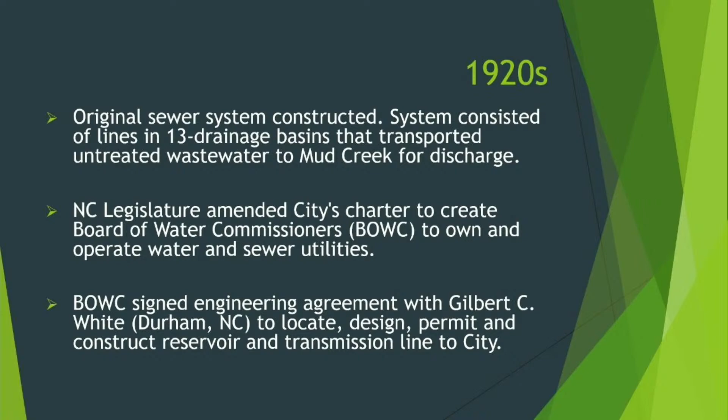Then in the 20s, the legislature changed the city's charter and created the Board of Water Commissioners, a 3-man board charged with the operation and maintenance of the water and what was going to be the sewer system. In that same time frame, they signed a contract with Gilbert White out of Durham, North Carolina, to do the permitting and locate the reservoir for the water system, which they located on the North Fork of the Mills River, along with a transmission line and a reservoir in town, near Laurel Park.

The impoundment and the lines were about 17 miles of cast iron line that was built to Ewart Hill, which is a 5 million gallon in-ground storage tank, still there, at a cost of about $461,000 for 17 miles of cast iron line. That just amazes me, and to see where this line is, it's incredible.

Lee, can I ask just a question of ignorance? I've been up there - is the line that comes out, that cast iron line, still the same one that was put in the ground in 1920? It sure is. Yeah, we keep enough velocity through that line to try to keep sediment out, and it's still in good shape.

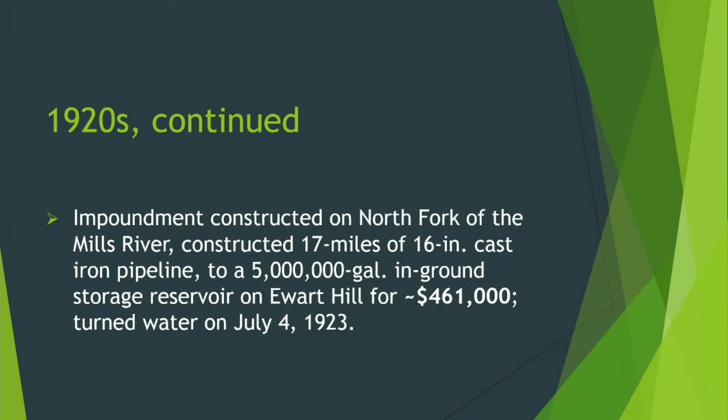Just for the benefit of the citizens listening to this, it's worth a trip. It is, it's really quite amazing, to see where these people built this. But don't bring your fishing pole, leave that for me.

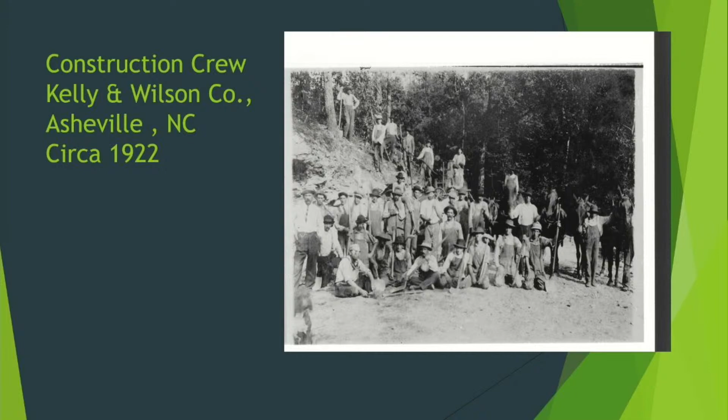Kelly and Wilson was the contractor out of Asheville. I'm guessing there's no reference to this being that crew, but this is the only photo that we have.

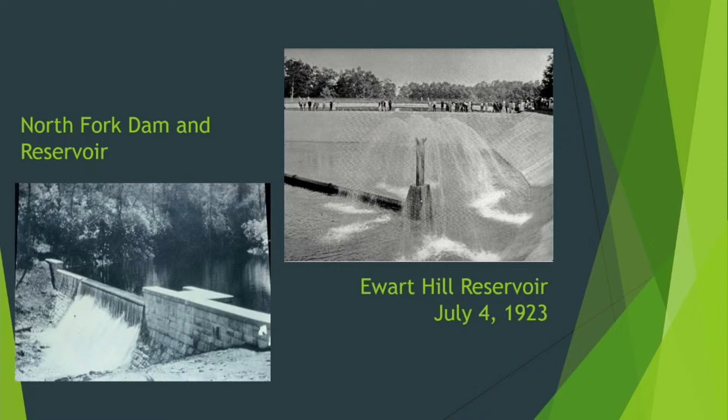Apparently they decided that wasn't enough water. So in the late 20s, they went to Bradley Creek, a tributary to the South Mills River, and built a little over 7 miles of 20-inch pipe at a cost of about $250,000.

If you know where the Woodpecker sawmill is, some people do. I've seen it, but I don't know that I can take you right to it, but I could find it. That's where the two lines converge, at a cost of $250,000. If you've ever picked up any part of a cast iron line, it's amazing to think these are 18 or 20 foot joints of pipe. I can't even begin to imagine how they moved them around.

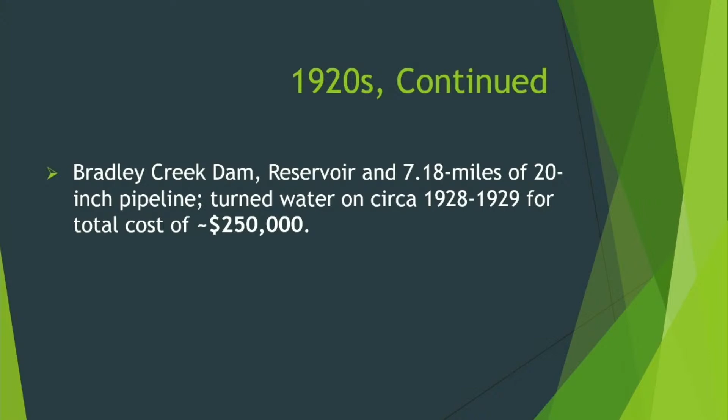Then in the 40s, some of you may have heard about this, the city started investigating the possibility of a large dam and reservoir, a 500 million gallon reservoir. It went along, and I've read correspondence back and forth, and in those days we didn't have internet, and don't know how well even telephones were working, so they were writing letters. You can imagine how long that took to correspond about one subject. So in 1947, after a lot of delays, the engineer said he was retiring, and the project kind of went away.

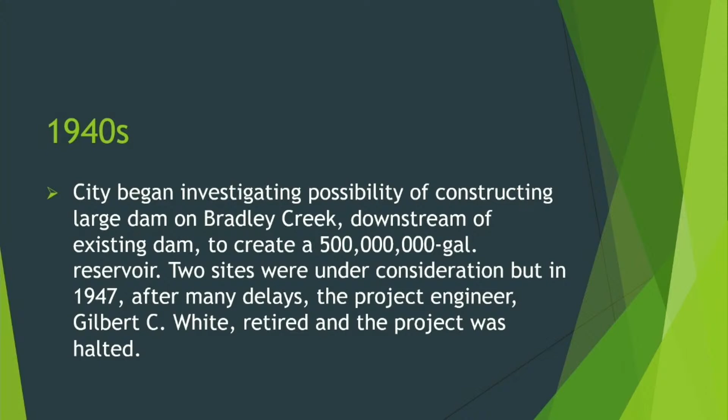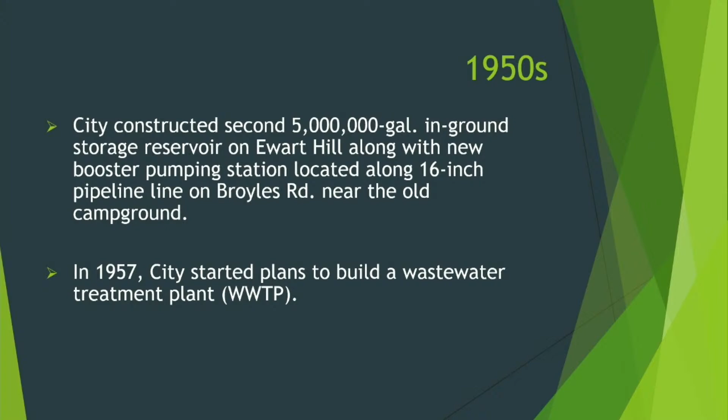So in '57, they started looking at building a wastewater plant. Harwood-Beebee became the city's engineer. I believe they were located in Spartanburg, and I actually spoke with someone a few years ago who had worked with them, but I don't think they exist anymore. They built the new wastewater plant for $1,020,000. That included the sewer interceptor, which, if you recall, I talked about the 13 lines that went straight to Mud Creek. That line goes along Mud Creek and intercepted each of those and took it to the plant. That plant is located, or was located, opposite the road on Balfour where our current plant is.

Then the Mills River plant, they called it a filter plant in the drawings. It was constructed about that same time frame, at a cost of about $1.5 million, and had a capacity of 3 million gallons per day.

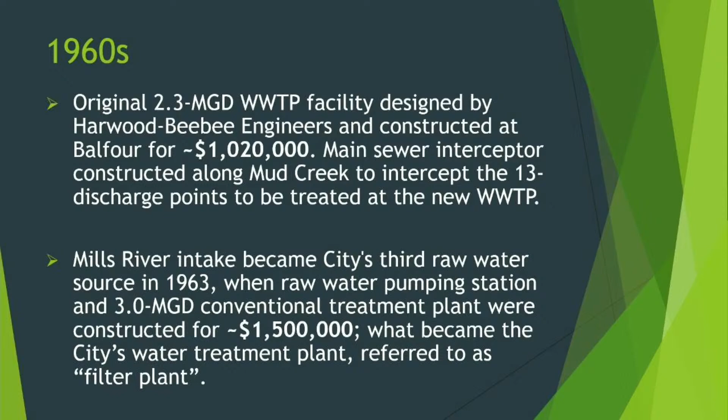Then, if you recall, they created the Board of Water Commissioners. In the 60s, the legislature took that away and gave the assets and privileges back to the city, the Board of Commissioners at that time.

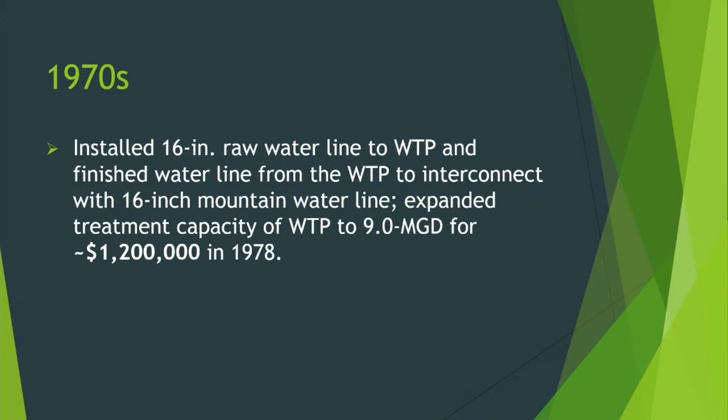Then in 1980, there was a service agreement between Henderson County and the city that defined a policy for the extension of sewer lines into the unincorporated areas.

During this time, the city was under a special order by consent, an SOC, having some problems with inflow and infiltration and meeting permit limits. They hired, at that time, an engineer to do the design of our rehab work.

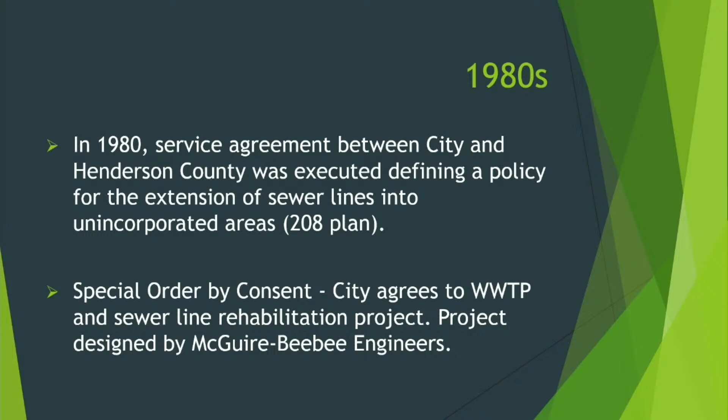In 1986, a service agreement was executed that basically did away with and replaced the previous agreement between the city and the county. It also included a 500,000 gallon per day allocation.

During the 80s, we were also under a judicial order by consent. We were not having a lot of luck with our wastewater plant and collection system, so we did another upgrade and worked on inflow and infiltration. Any sewer system is going to have problems with their I&I, but we've certainly had our share. We also received a fine for $20,000.

So in the 90s, we expanded the water treatment plant to the capacity we have today, which is 12 million gallons per day, at a cost of $2 million.

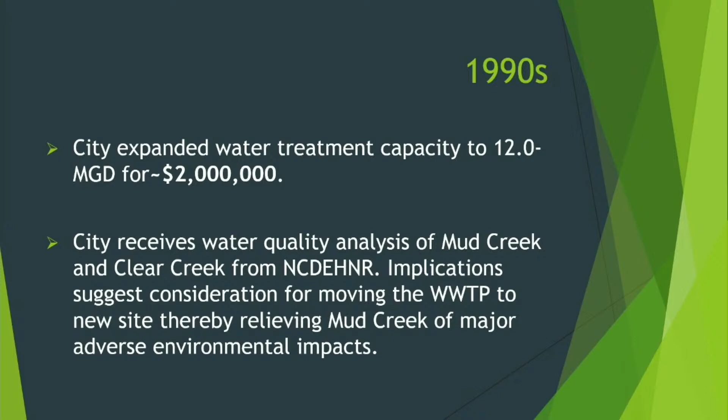And then we received word from DEHNR that they were advising us to move off of Mud Creek because of the problems they were finding in both Mud Creek and Clear Creek. So we started looking off of Mud Creek, and City Council approved the purchase of the Holloman property, near the confluence of Mud Creek and the French Broad River. So we were going to move to a much larger river.

The council received a petition with several signatures on it, and they authorized an evaluation to look at alternatives. They did that with Charlie Willis, or Willis Engineers, out of Charlotte, North Carolina. His report basically said we need to stay on the site we're on now, across the street, and put in tertiary filters, which in our case at the time were gravity sand filters. That was deemed a more cost-effective way to do this.

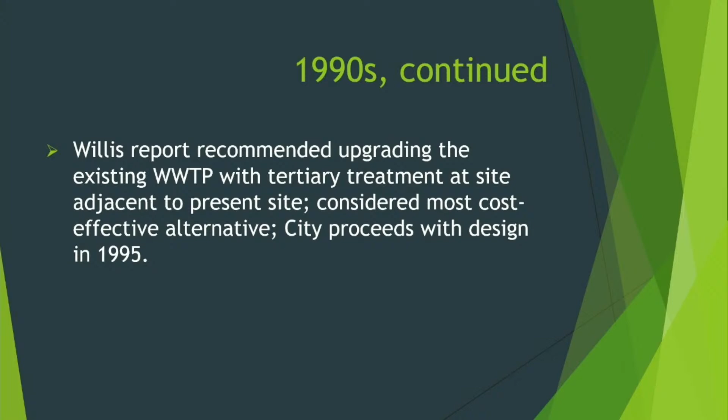So we proceeded with design, and in 2003 it was completed at 4.8 MGD. It went from 2.3 to 3.2 million to what it is today, 4.8, and that was at a cost of 19.4 million.

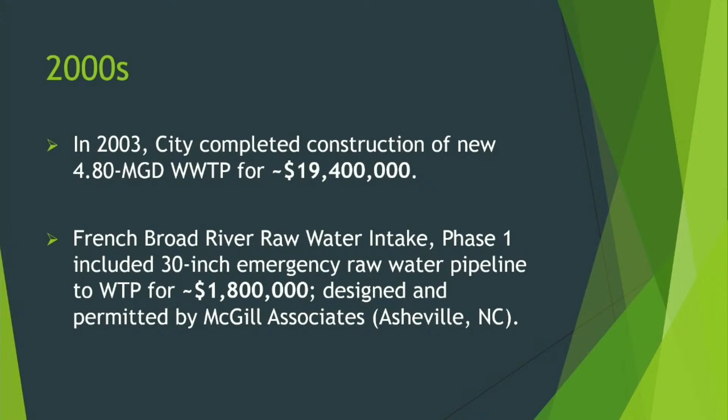And then we started working on our emergency raw water intake, because in 2007, 2008 we had one very severe drought. So we started looking at the French Broad River and built an emergency raw water line, received $500,000 in grants from the Rural Center, and proceeded with that project. McGill designed that project for us.

Then mid to later 2000s, we upgraded our plant - well, actually renovated the plant. We were going to do an upgrade, but could not go to the Mills River for any more water, so we just did a renovation. That was at a cost of about $20 million. We did add some capacity that is not used, but we can easily use it, and Adam will speak to that in a little bit.

2009, our Eastside booster pump station was put in service at a cost of about $3.4 million. And while we're doing each of these, in a lot of cases we're trying to eliminate smaller pump stations.

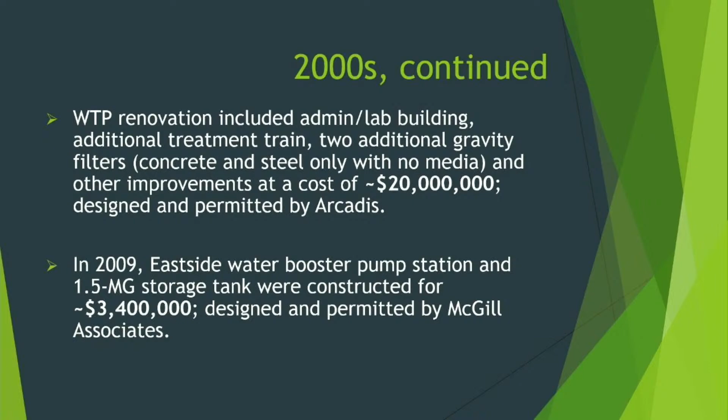Then in 2013, we completed our AMI project, which allowed us to read all of our meters from 13 towers around the county. So we were no longer touching each meter every day or once a month - now we can look at them daily.

During this time as well, Brent Detwiler, our city engineer, designed 3 projects that provided sewer through Jackson Park, eliminated that pump station, Wolfpen, and Shepherd Creek - part of the Shepherd Creek project brought sewer out to Atkinson Elementary School, who was having serious problems with their septic system. Henderson County contributed $500,000 towards that project.

Then in - Lee, Mark is corrected - it's $600,000 that they, excuse me, contributed. 600. Nothing like a good engineer to hold our feet to the fire. Okay, thank you, Marcus. 600.

Then in 2016, we started design on our French Broad River intake and pump station. We already had the line; we were now proceeding with the pump station.

At that same time, we completed a high service pump station upgrade at our water plant, which allows us to pump up to 21 million gallons a day. Our current capacity of the plant is roughly 12 MGD, and by upgrading the high service pumps, we're able to take it into the future to 21 MGD. We determined that everything that was there was capable of pumping 21 million - that requires new pumps and motors and things like that in the future, but we have that capacity.

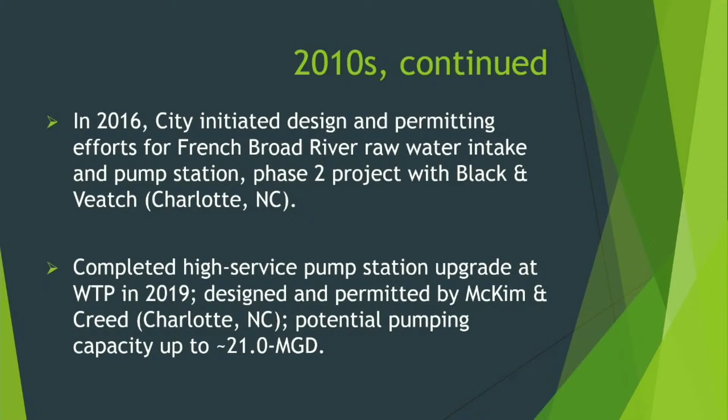And then we built the north side pump station, which is in Fletcher, at a higher elevation, which satisfied some marginal pressure issues we had, at a cost of about $5.4 million.

And then Etowah - we've been trying to do that project since I came here, so it's been a long time in the making, and it's still not online. We have some old lines out there that we're having to replace before we bring it up to higher pressure. That included about 14,000 feet of pipe and a 500,000 gallon storage tank, at a cost of about 6.8 million, and of course a pump station.

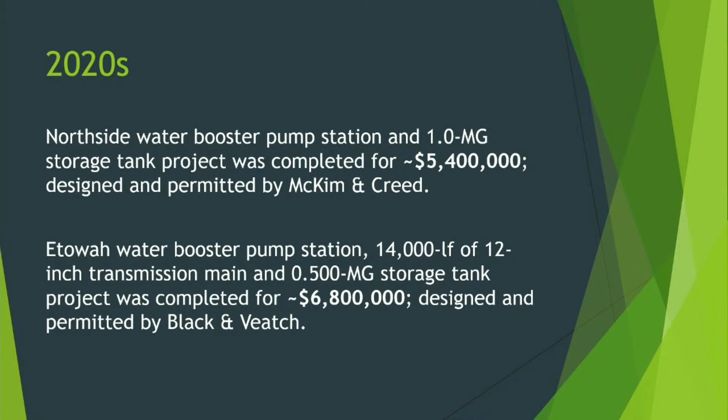There's more information about our history in what's called a story map. It's on our website, under water and sewer, and then about us, if you'd like to go look at it in more detail.

With that, I'm going to turn it over to Lee. Before we get to Adam and the future, a couple of thoughts. I'd be remiss if we didn't recognize Bill Apsley's tenure with the city for many of those years as Assistant Utility Director and engineer. A lot of those projects in the middle of that century involved Bill, so I'd like to recognize him for that. If you really want the history, Bill can share with you. It's a great presentation if you haven't seen it.

A couple of thoughts though. Lee showed the two reservoirs on Ewart Hill. They're still in operation. There are two 5-million-gallon reservoirs on Ewart Hill, which is really at the end of 3rd Avenue, up to the top of the hill. So you'll see that, and they're serving our city today. We just rehabbed one of the 5-million-gallon reservoirs this past year under the guidance of Adam Stewart.

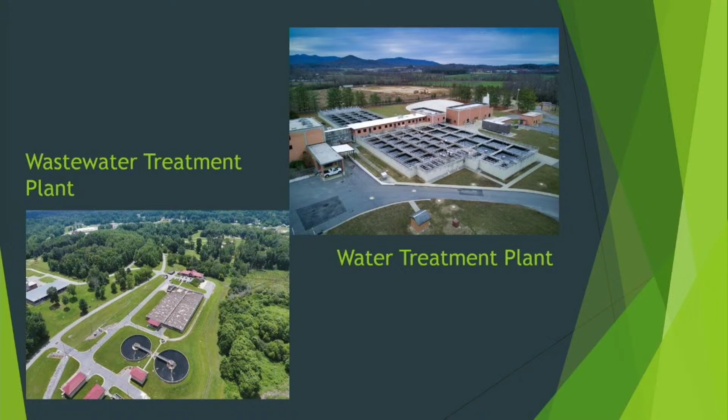Number 1 is renewal and replacement of aging water and sewer infrastructure. We just mentioned a lot of our pipes are 100 years old - a lot of the infrastructure is aging.

Number 2, financing for capital improvement. Construction is expensive, and it's getting more expensive.

Number 3, long-term water supply availability. We saw in the history, going back, starting from Finley Cove to the North Fork Reservoir to Bradley Creek, the utility has always been looking for that additional water source to supply the future. We're currently doing that now with a new intake that I'll get into in a couple slides.

Number 4 is aging workforce and anticipated retirements. In the water and wastewater industry, there's a lot of folks nearing retirement age, so we want to make sure we can fill their shoes for the future and continue to operate these systems successfully.

Number 5, public understanding in the value of water systems. I think we all take water for granted a lot of times, and it's when we don't have it that we realize how important it is. A lot of communities around the nation have recently seen this and are realizing the importance of water. Some of the other issues further down the list are about newer technology, but I think a lot of these issues have been there for 100 years.

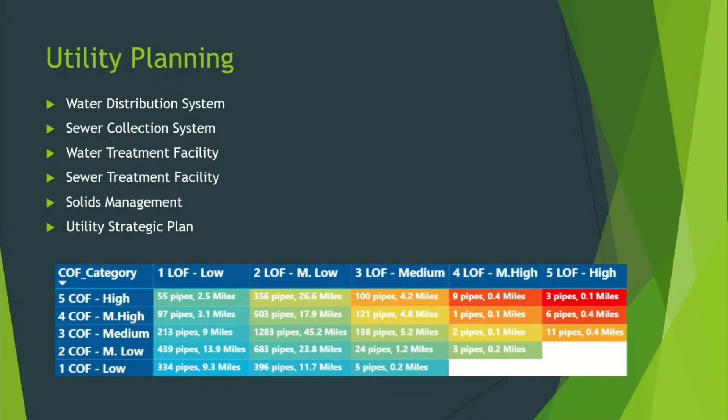These master plans all create and recommend capital improvement projects. We have a 10-year, $295 million capital improvement plan, and we won't get into all the projects because there are 62 of them identified, but we'll cover a few of the bigger ones, the ones under construction now or that will be over the next several years.

The first project is our French Broad River intake and pumping station. This is located just downstream of the confluence of the Mills River and French Broad, and it would provide an additional water source. It's, among many things, a resiliency and redundancy project, giving us our 4th water source. And it's sized for the future.

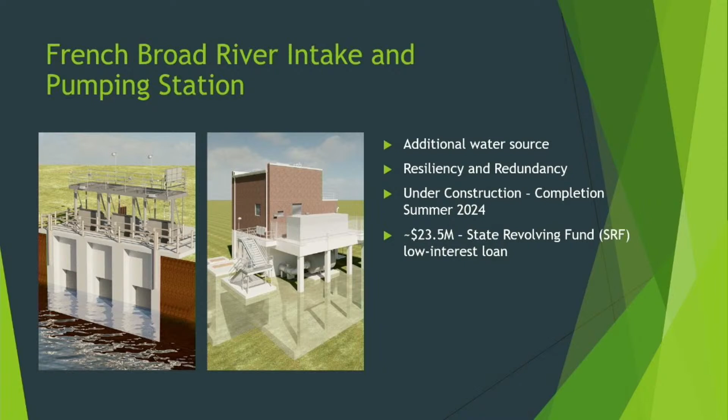It'll have an initial capacity of 15 million gallons per day, and by changing out the pumps, motors, and some other process equipment, it'll be able to serve 21 million gallons per day. It's also located on the French Broad River, which is more resilient to drought than our other water sources. This project is currently under construction, with a planned completion date of summer 2024, financed with a $23.5 million state revolving fund low interest loan.

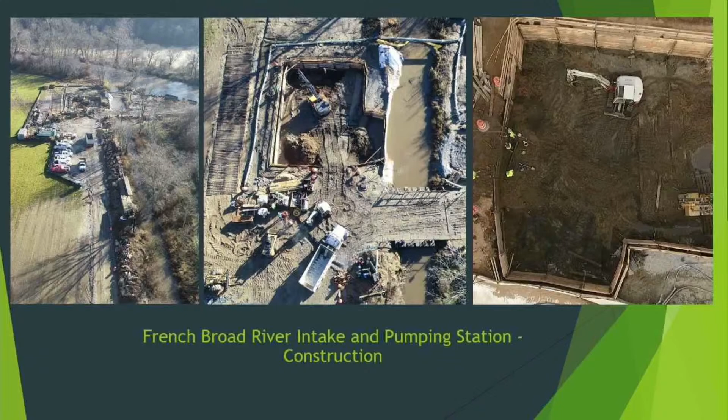I've got a few photos of construction, taken over the last few weeks. You can see some foundation work being done on the intake there at the French Broad.

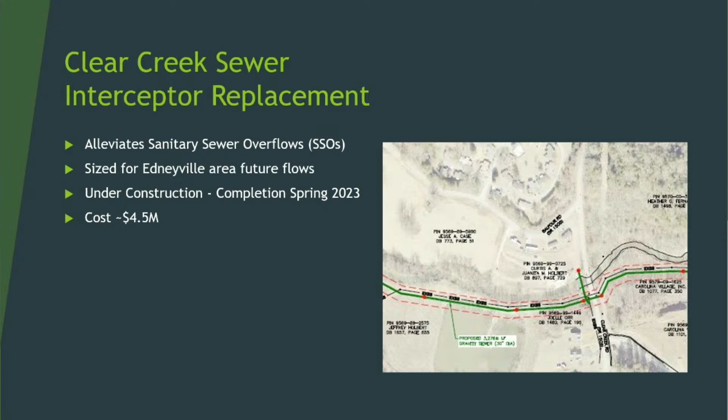The next project that's also under construction is our Clear Creek Sewer Interceptor replacement. This is located along Clear Creek, just upstream from the confluence of Mud Creek and Clear Creek, then it travels behind Carolina Village and crosses under I-26. It's about 3,300 feet of 30-inch gravity sewer. It was identified in our sewer system master plan as a high priority project, and it alleviates existing capacity issues in that area, while also being sized for projected demands upstream, including the Clear Creek Basin in the Edneyville area. This project is just about finished, probably in the next few months, and the cost is $4.5 million.

The next major sewer project is the Mud Creek Sewer Interceptor replacement. In the history we saw that when the wastewater treatment plant was built, there was an initial interceptor that collected all 13 discharge points to the creeks. Well, this is that line. It's a little over 60 years old, and the project entails about 10,000 feet of upsizing, from 24-inch to 36-inch sewer, so we're upsizing that line to meet existing demands but also for the future. This project is currently in the design and permitting stage, with an estimated construction timeline of late 2023 through 2024, financed through a $9.3 million SRF low interest loan.

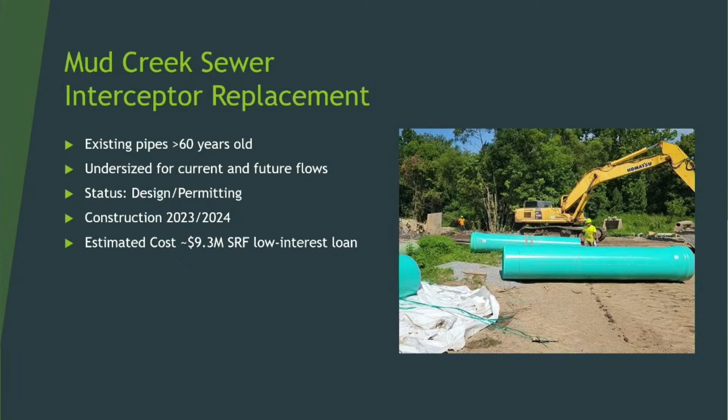Question: there's a lot of construction going on, especially close to Clear Creek and close to the plant. How much do you anticipate an increase in usage or capacity from the projects currently under construction?

On the water side right now, our plant has capacity for 12 million gallons per day. Our average daily demand flow is 7.5 million gallons per day. So we do expect maybe an increase with additional customers, but interestingly, our water demand has actually been relatively flat over the past couple of years, maybe even slightly declining, a lot of that due to conservation measures — toilets are much more efficient now, and folks maybe aren't irrigating as much as they used to.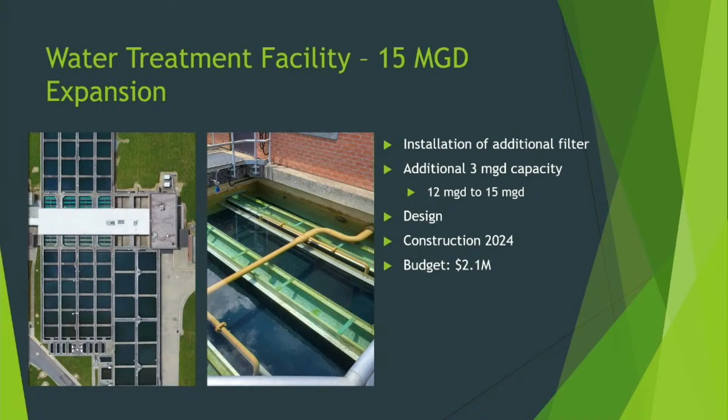Next project at our wastewater treatment facility is the thermal dryer system. As we mentioned earlier, water and wastewater treatment both produce solids. Our current solids are about 16% solid, so that's about 84% water. This facility would bring that to 90% solid and 10% water. It's basically a big oven, so it just dries the solids more and removes that moisture content.

The solids that would come out of this dryer can be beneficially reused for agriculture, fertilizer, landscaping, etc. Right now, our biosolids are taken to a landfill and disposed of, and that is very expensive, and it is a burden for the utility ratepayers to hold that cost. We've also had issues with relying on landfills—we have been turned away, and we've had to go searching for various landfills. It's a risk for the utility to continue that outlet.

This project is also proposed to include a solar energy system on the roof, a photovoltaic system, to offset some of the additional electrical usage at this facility. Right now, we're at engineering procurement for this project, with construction tentatively set to begin sometime in probably late 2024 or 2025. The project has an estimated cost of $11.9 million, and we have applied for an SRF low-interest loan for this project.

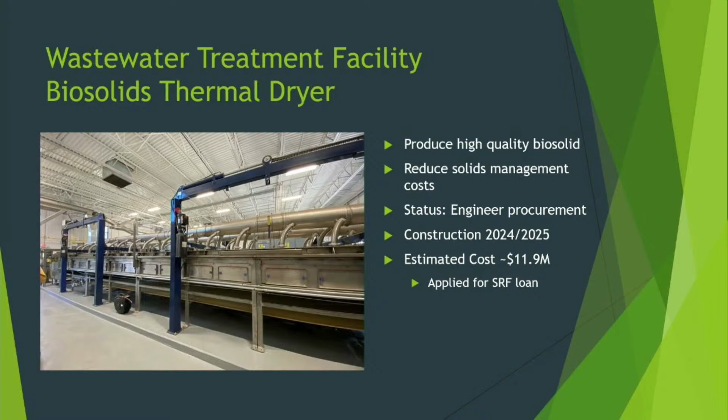Last project is our wastewater treatment facility headworks and flow equalization project. The headworks of the wastewater plant is basically the front end of the plant. This is upgrading the influent pump station with bigger pumps, installing a screen in front of the headworks to extend the life expectancy of the influent pumps, and also an improved grit removal system that would protect the equipment and improve the facility's efficiency.

And then as well as a 3 million gallon equalization basin. The equalization basin would collect the wet weather, the additional flow the plant receives during a rain event, and would hold that volume and then release it into the plant slowly. Currently, during a large rain event, the treatment plant cannot handle those large flows, so the wastewater in the sewer lines kind of just sits in those pipes and starts backing up into the system until the plant can treat it and discharge.

The status of this project is in the evaluation and pre-development stage, with the tentative construction date of 2026. Estimated cost for this project is $29.5 million. I'd also like to mention this project will upsize the headworks of the treatment plant to a 6 million gallon per day capacity. While the plant would need some other upgrades to go to 6 million gallons per day, this would be a pretty sizable portion of that expansion cost.

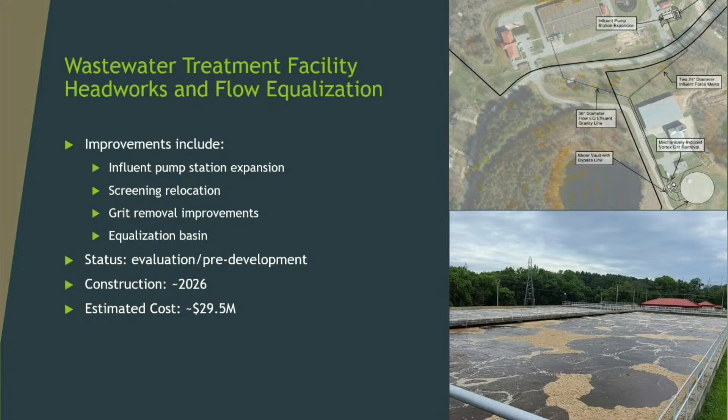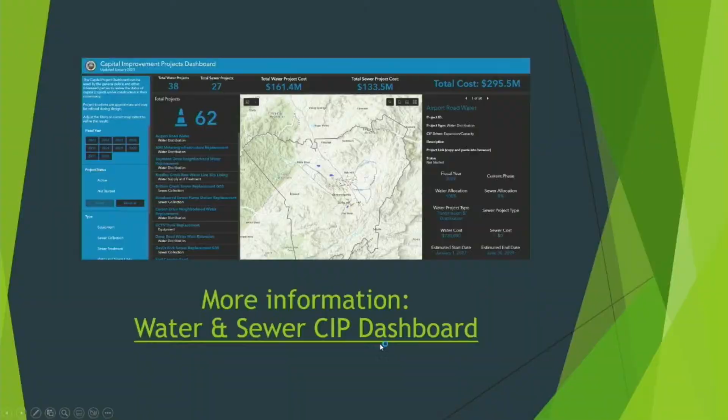We also have a water and sewer dashboard of all of our 62 capital improvement plan projects. We'll click on this—it's available on our website. Just wanted to show the map very quickly. This is a great tool that's based on our adopted capital improvement plan.

A couple things: there's an overview of the projects at the top. You can see we have 38 water and 27 sewer projects identified, and their costs total respectively to that $295.5 million number. On the left-hand tab, you can break down the CIP by year, so we can click on FY23, and it'll sort through the projects identified for this current year. You can click on one of those projects and it will take you to that project on the map, so you can see where it's located.

Then on the right-hand tab, there's a description of the project and some other information regarding it. If we back out of all that, there are also other ways you can sort through on the left-hand side. You can sort projects by their type—equipment, water collection, water distribution, sewer collection, etc. You can also sort the projects by a CIP driver: is this an expansion or capacity-related project? Is this a renewal or rehabilitation project? Or is this an equipment or operations project?

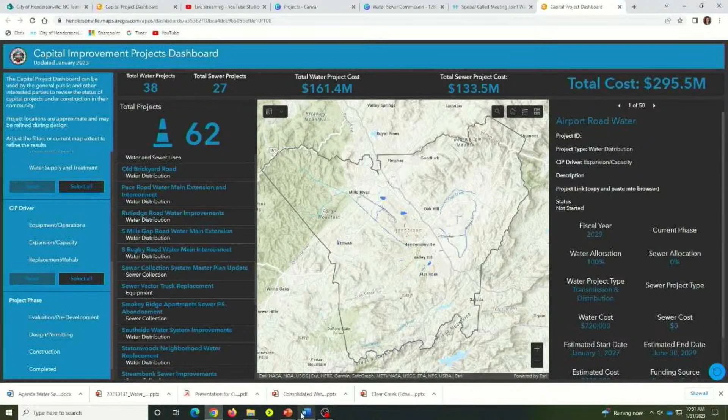Make a note that the city has used 50 minutes. Well, what have I done?

Thank you, John. I wanted to give you a quick presentation on some of the future utility plans of the commissioners.

But first, John doesn't know this, but I've got my 4-hour presentation on the theory of concrete design I'd like to go over with you. Don't worry, we've ordered lunch, so it shouldn't be a problem. No, seriously though, I'm very proud and honored to be part of this community and especially this effort. I think it's monumental and glad to be here. I was wondering why John even had me do this presentation, and then during Lee's presentation he turned to me and said, so engineers are the problem. And I was like, oh gosh, come on. But actually he's probably right. We solve problems that you didn't know existed, spend a lot of money in the process, so maybe that's the issue, Adam, coming from NC State and all that.

Clear Creek, our Edneyville sewer system - one thing I'd like to make note of, and have everybody in the room pat themselves on the back for, only an engineer would think like this, but it's true, and I think it's a big feather in our caps. When we hook Edneyville Elementary up to public sewer, it will be the last public school in Henderson County to get onto public sewer. Big whoop-de-doo, well, there's nobody around us that has that same feather in their cap.

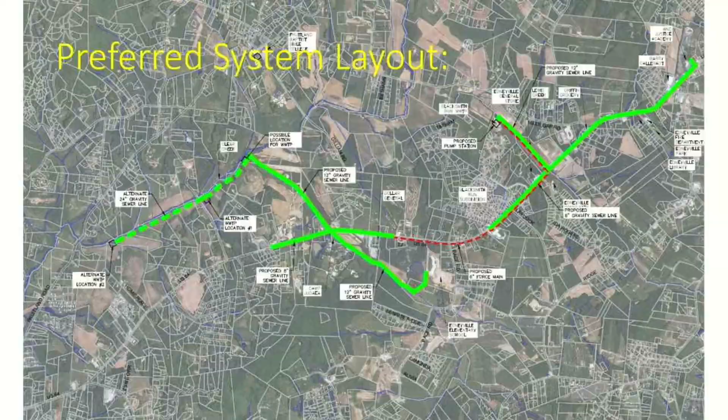But it's a good start and allows us to get to the first phase of the project, which is - we have contracted with WGLA Engineering, our fine local firm, to help us with a permit application for an NPDES, a National Pollutant Discharge Elimination System, which will allow us to discharge into Clear Creek should we be successful with the permit. This is the first step in our Edneyville sewer system, and coincidentally we have a public hearing on the permit application this week.

The project is being funded, as you can see, at $12.7 million with a direct allocation from the state - state ARP, American Rescue Plan money - plus $9.3 million of the county's portion of ARP funding, for a $22 million total project budget.

And here is the schedule. I have a clip from WGLA's agreement. In their process, the NPDES permitting process runs till the end of this calendar year. Add about another 18 months for the design and permitting, taking you to mid-2025, and then construction takes another 18 months, to somewhere around the end of 2027 for project completion.

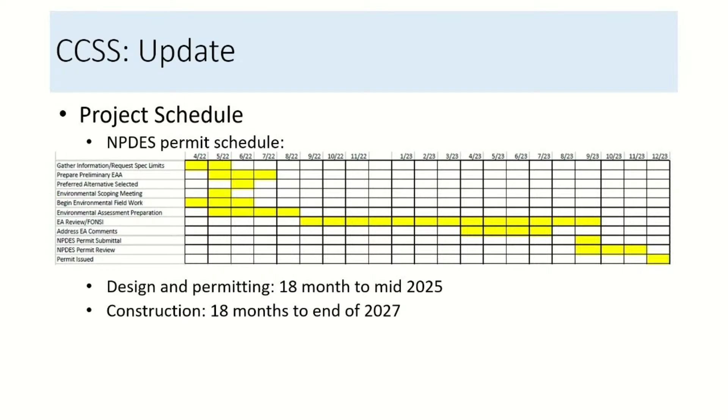And that's all I had on the Edneyville system. I think now might be an appropriate time if there are any questions folks may or may not have about your particular part of the future.

Yeah, I noticed how they put me after Adam. Well, you've either done a really thorough job or exhausted everybody, I'm not sure which is true. I'll take my guess on which one it is.

Anybody have coffee?

I believe Councilwoman Hensley reached out to John Connet and some other folks about putting a trip like this together, in combination with the chair at the time, Commissioner Lapsley. And we took a trip in a van. I drove. I believe the mayor, and now chairman, also attended. We had a day's worth of meetings down there with folks from the county and the city.

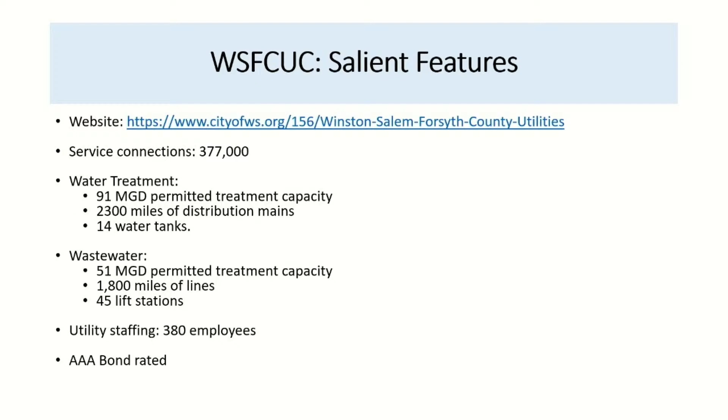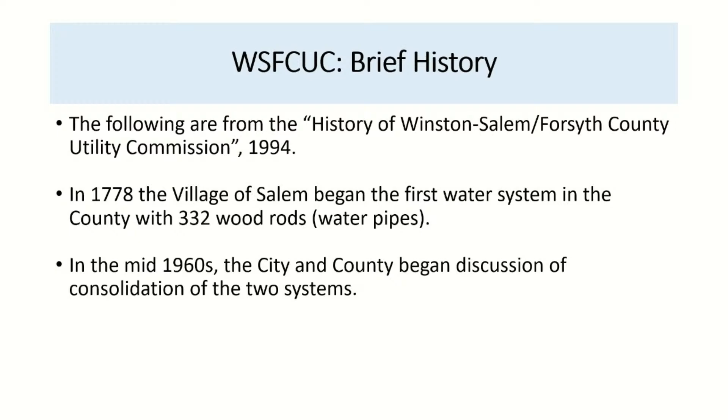Another point to note was discussions about a consolidated system started in 1960. So there was quite a bit of discussion and deliberation on the formation of the commission. And then it happened in April of 1976. There's actually some pretty funny anecdotes in the story about, I think, one of the county commissioners' wives showing up to the meeting and speaking during the public comment.

And what was it, John? She said she doesn't think it's a good idea because she hasn't seen any progress and doesn't know how they're going to be able to manage this system because they can't get anything done. It's pretty funny.

But importantly, in that consolidation approval were 5 provisions that they developed the agreement from. The facilities were to be owned by the city, including the county facilities that were currently county-owned, and the city facilities. The city would pay the debt on the county system that was consolidated. The city provides water and wastewater services to the consolidated area, and the utility operates as an enterprise fund, which most utilities do. And there was the formation of a city-county utility commission.

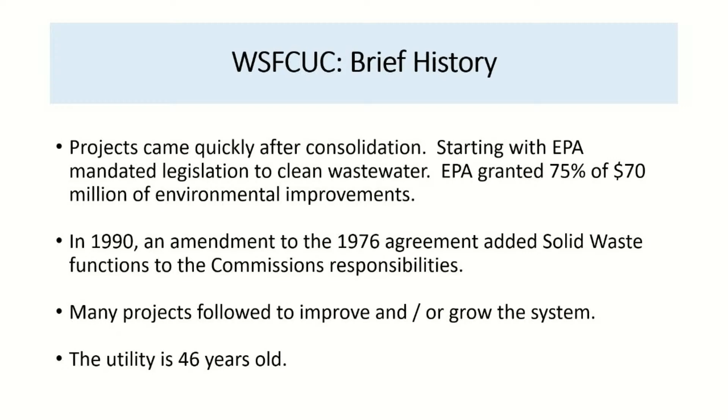46, yes. What I wrote, not what I said.

From that agreement, there were, I think, 11 paragraphs that detail the agreement. The first being ownership and management. A couple of points from that paragraph: the county conveys to the city all lines, treatment facilities, equipment, real estate, etc. And the quote from it was, 'It will be under the direct operation of the city.'

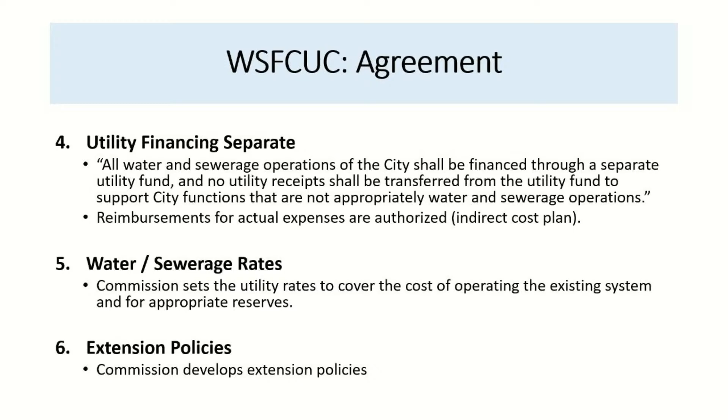And the commission itself was a 10-member, or is a 10-member commission with a chairman. 5 of the members are appointed from Forsyth County and 5 from the city of Winston-Salem. And an interesting note, the chairperson is jointly appointed by the mayor and the chair of the commissioners. And the chair has different terms, I think they're 2-year terms up to 5. And then the members have 5-year terms, but I think 2 maximum terms. And it's all defined and spelled out in the agreement.

Another interesting point out of that paragraph was that no member of the aldermen or county commissioners can serve as the chair or a member of the utility commission. And from looking at the website, I think John was correct in his assessment that typically their members are business community members, because the utility is a public utility, probably about as close akin as you can come to a private business enterprise that a government will have. Of course, it's a monopoly, but it's regulated, self-regulated by the elected members that run it.